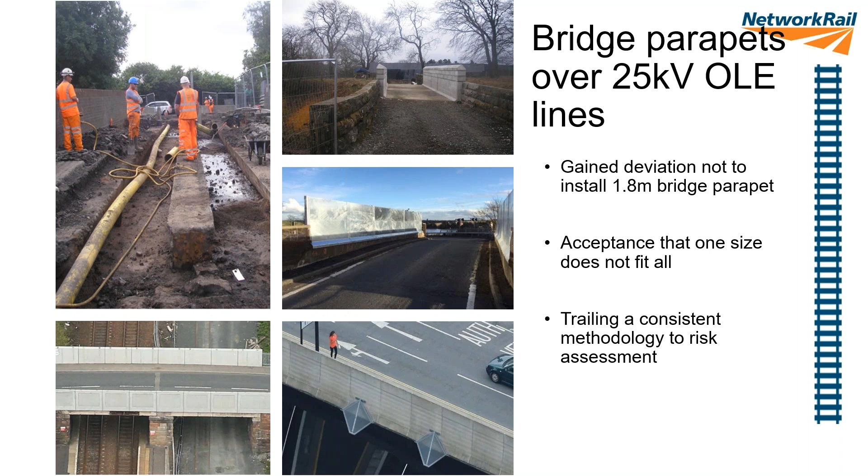But that's one opportunity we've developed with regards to bridges. The main cost in terms of bridge reconstruction is how we get the wires underneath the bridge.

In the good old days, as people have reminded me many times, we followed the Blue Book, published by the Department of Transport. This had a hierarchy showing normal clearances, reduced clearances, and special reduced clearances. For each of those levels in the hierarchy, we had a simple and well understood set of assumptions and design tolerances.

Now in CP5, a number of factors happened, including fixed deadlines for project authorisation and the combination of the TSI, GLRT 1210, AsBos, DeBos, etc. Projects were unwilling to jeopardise the authorisation of electrification and the start of service stage. This meant that clearances grew rather than reduced, and in many cases the clearances in Control Period 5 were almost up to 5 metres in terms of the soffit height.

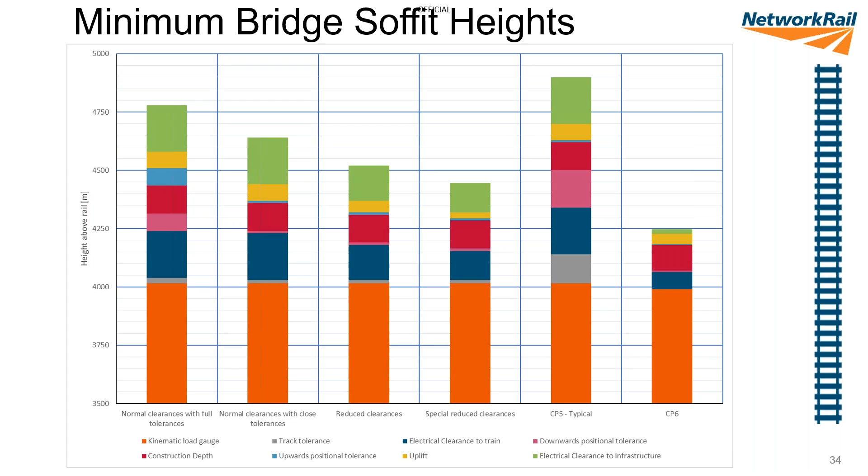And compliance with all key railway standards. The key railway standard is obviously GLRT 1210, which requires an electrical clearance derived from BS EN 50124, or a reference system of 270 millimetres, or a risk assessment.

50124 requires an electrical rating of 200 kV for basic insulation. 200 kV is not a new value.

It's a value that's been used for the last 50, 60 years for testing and demonstrating the insulation rating of overhead line insulators, switchgear, cables, transformers, etc. So it's a long-standing value.

50124 also provides categories for reinforced insulation, which is equivalent to double insulation, and functional insulation, which provides sufficient insulation for operation of the electrical circuit, but not sufficient to prevent or protect against electric shock.

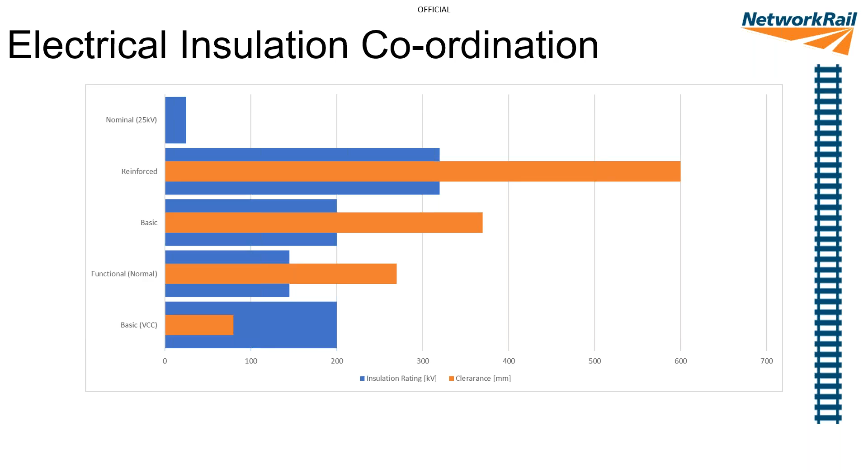Transients occur on the electrification system for a number of reasons: switching or operation of a vacuum circuit breaker, or overhead line switch, or the VCB on the rolling stock, poor contact between the contact wire and the pantograph, or maybe even the high frequency switching on modern traction packages.

Historically, British Rail carried out impulse testing to develop the electrical stress graded bridge arm back in the 70s. But this used a waveform derived from a British standard from the 1940s, which is much lower in magnitude.

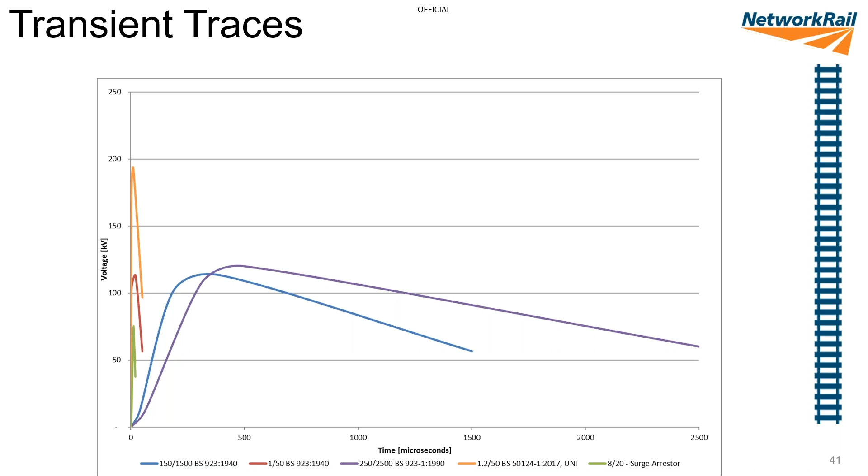The surge arrestors that we've used are applied either side of an overhead line structure, with two surge arrestors on each electrical section. Those two surge arrestors provide a level of redundancy should one fail.

The surge arrestor is connected via a jumper to the catenary of the overhead line system, and then connected to the earth connection of the overhead line structure by a jumper at the bottom of the surge arrestor. It's mounted on a 25 kV standard insulator and has an expulsion fuse at the bottom of the surge arrestor.

So in the event that the surge arrestor is severely overloaded, which seems very unlikely, the expulsion fuse would operate and the earth connection would drop down, taking the surge arrestor out of circuit.

The electrification system would still operate, but the protection offered by the surge arrestor would no longer be available until that surge arrestor was replaced.

Surge arrestors are nothing new. They were developed almost 100 years ago and are widely used in the electrical supply industry and almost all modern electrical rolling stock.

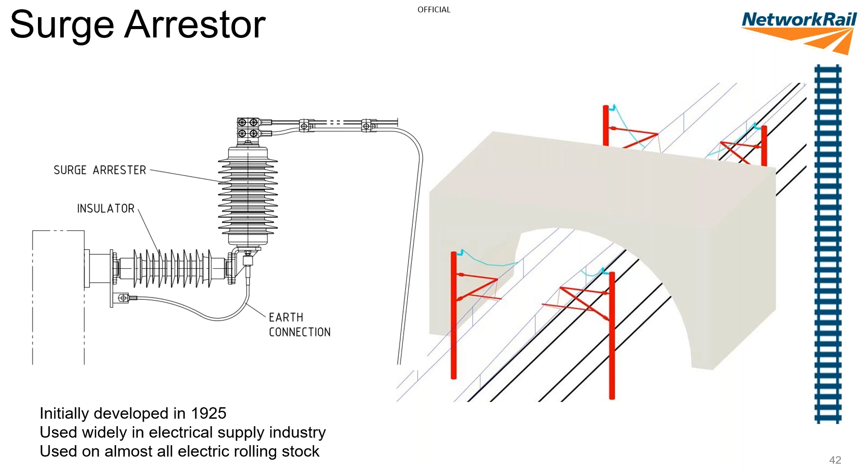And it's not just Network Rail that's using surge arrestors in electrification projects. This is an example of the Danish railways, courtesy of Google Maps.

You can see that surge arrestors have been installed next to a low clearance bridge to mitigate the effect, allowing low clearances underneath that bridge.

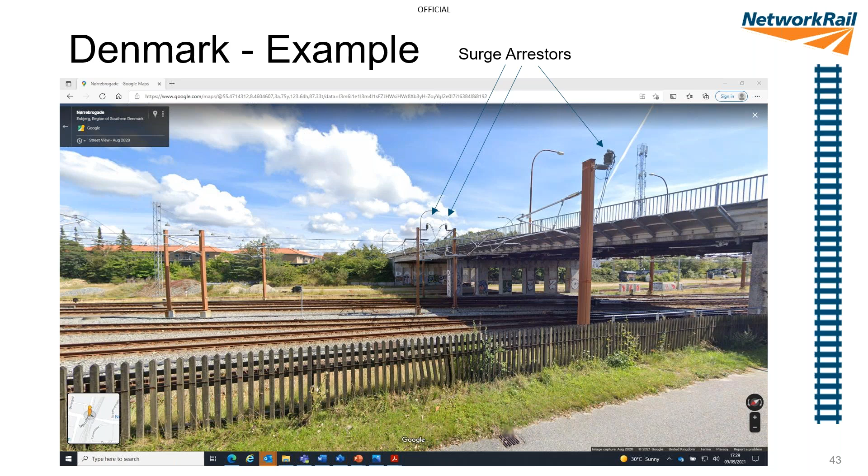And here's an example from Tokyo, a different electrification system. I think it's 20 kV compared to the 25 kV system in Denmark.

But you can see surge arrestors, similar concept, applied to a portal adjacent to the low clearance bridge, and supplementary insulation in this case also applied to the contact wire at the bridge itself.

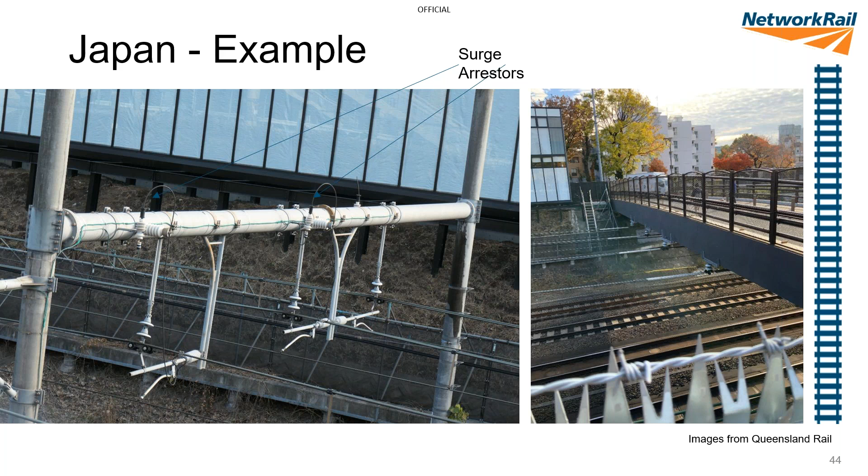But where we are different to the other railways is that we've taken all the components that form the electrification system under the bridge and tested them as a system.

Tests we've used are in accordance with the standards you can see on the left, which require testing with both positive and negative impulse transients or waveforms.

It also requires those configurations are tested multiple times and provide a withstand with no flashovers before the configuration can be declared a success.

Now we've enhanced the test requirements and standards by testing in wet conditions as well as dry conditions, and those wet conditions require a salt mist applied in the environmental chamber to take a real worst case environmental perspective on those clearances.

And we further enhance those tests by applying pollution to all insulated surfaces of the components that we're testing.

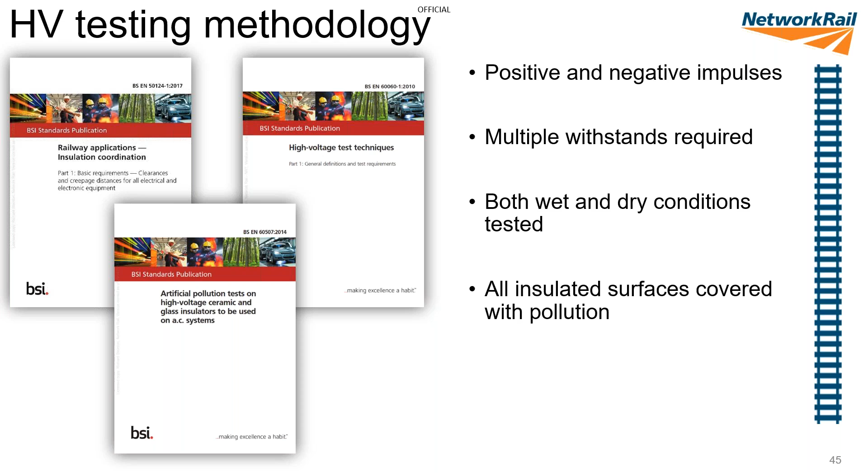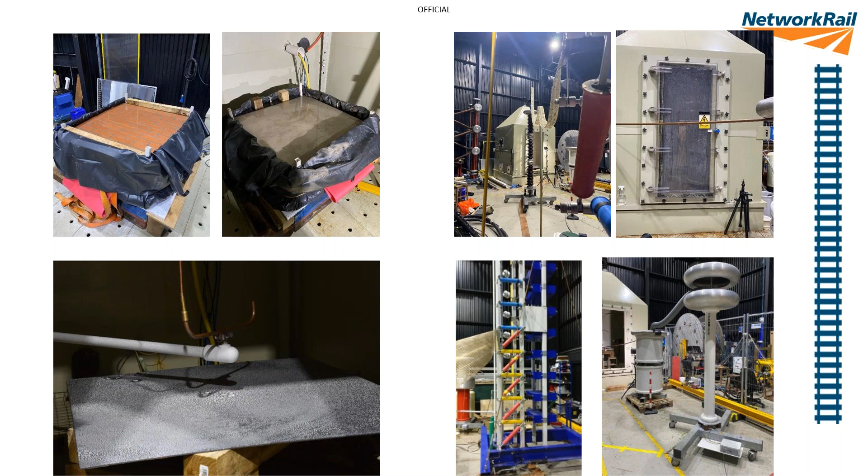On the left you can see some of the bridge samples, with the brick and concrete samples at the top of the screen. These were pre-soaked in what was known as a paddling pool over the weekend before any testing commenced, so a minimum of 48 hours. At the bottom there's a steel plate representing a metallic bridge, coated in an insulated polyurethane coating, with a pollution mix applied to the top of the coating.

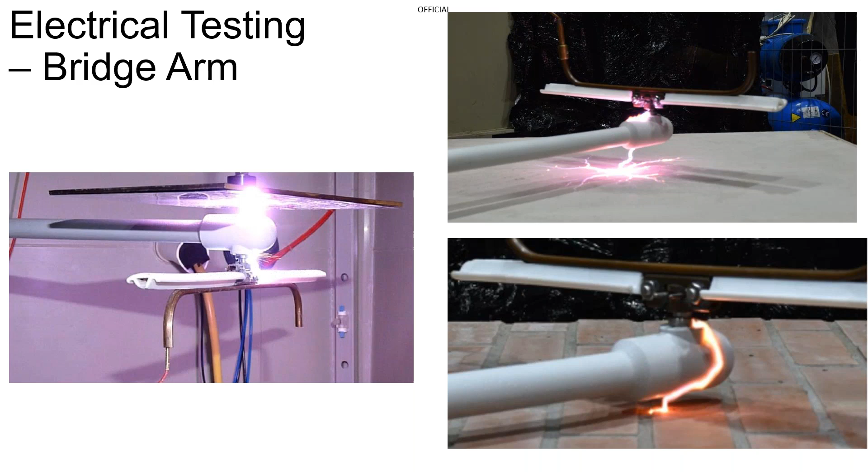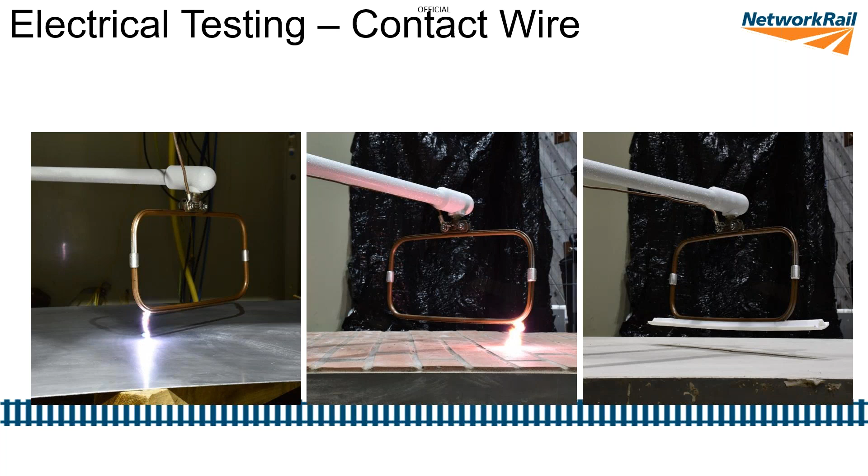Unfortunately, the photographs always look boring unless we have a flashover, so I've selected photographs that do show a flashover, but rest assured the path is only a few millimeters greater than in these flashover photographs. To demonstrate that, these photographs show the top of the contact wire to a bridge structure, and as you can see on the right hand side, without a flashover, the photograph looks very boring. Similar to before, we've got top of the contact wire to steel, brick and concrete, and the concrete sample has a secondary insulation in terms of contact wire cover applied to the test.

The gauge profiles we've used have been W6A, W10, and W12. We then supplemented that by adding an aerial onto the top of one of the profiles to make sure we've got a worst case electrical stress raiser on top of those profiles, and it lined up perfectly with the contact wire.

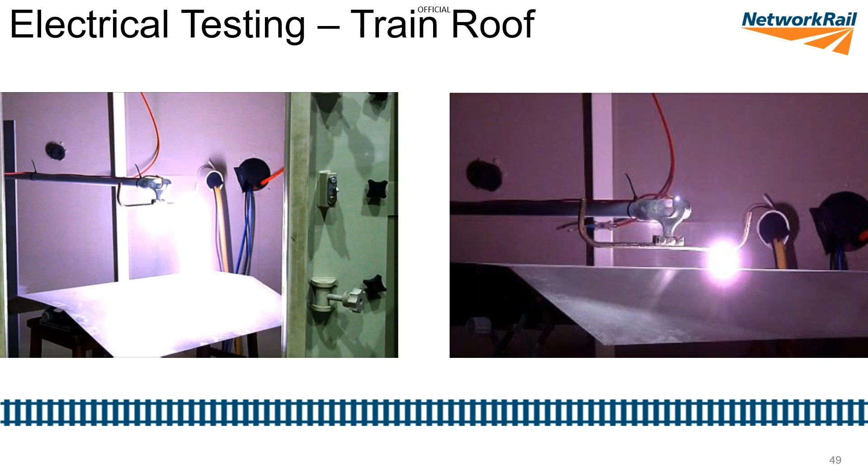We have also tested pantographs, with RSSB, using the open horn pantograph design and a closed horn pantograph design.

Further testing has been carried out in Scotland in service. Here we have a surge arrestor on the structure away from the bridge, and an insulated plate applied just directly above the bridge arm on the cantilever arrangement, allowing it to swing in and out should we have any problems with the in-service trials. I'm pleased to say the arrangement withstood the Glaswegian weather, and we were able to complete the test without a single flashover between the bridge arm and the plate.

And then we've got Cardiff Intersection Bridge. It was energised December 2019 and it's performing well to date. We've tested around 20,000 different impulses, and there's a selection of testing we've carried out there.

To supplement those configurations, we've also added supplementary insulation in terms of the contact wire cover and the insulated coating applied to bridge victim plates. So we've got a wide range of options available to designers and projects to really minimise those electrical clearances.

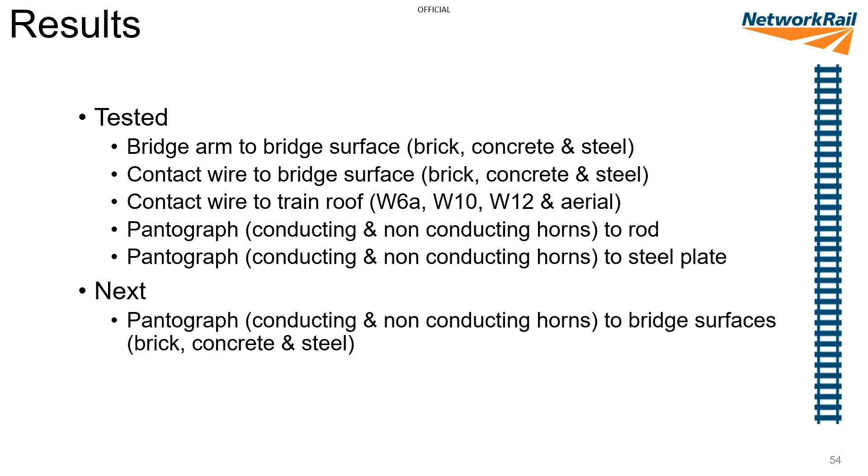We've also tested pantographs both with a conducting horn and a non-conducting horn, following success we've had testing the pantograph horn from HS1, or the Javelin trains. We took a pantograph horn off an in-service train, subjected it to impulse testing, and found it really promising. That prompted another avenue of development with Brecknell Willis to develop a composite pantograph horn that can be retrospectively fitted to the HSP Mark II and HSX pantograph heads. As you can see, it's a simple bolt to be undone, the pantograph horn swapped over, and a new pantograph horn inserted and secured.

We've carried out a number of tests and hope to get the trial commencing soon. Those tests have included a mechanical test and an electrical test. We've applied over 1,000 newtons to the tip of the horn and measured the deflection at the key transition between the carbon carriers and the insulated horn.

We've also carried out an abrasive wear test to compare the composite horn with the steel horn. I'm pleased to say the composite horn only lost 7% of its cross-sectional area, compared to a steel horn which lost 30%, in tests operated on the same location of those horns for approximately 200 kilometers.

Electrically, the horn does not flash over when an earth plate or earth rod is in contact with the tip of the pantograph horn.

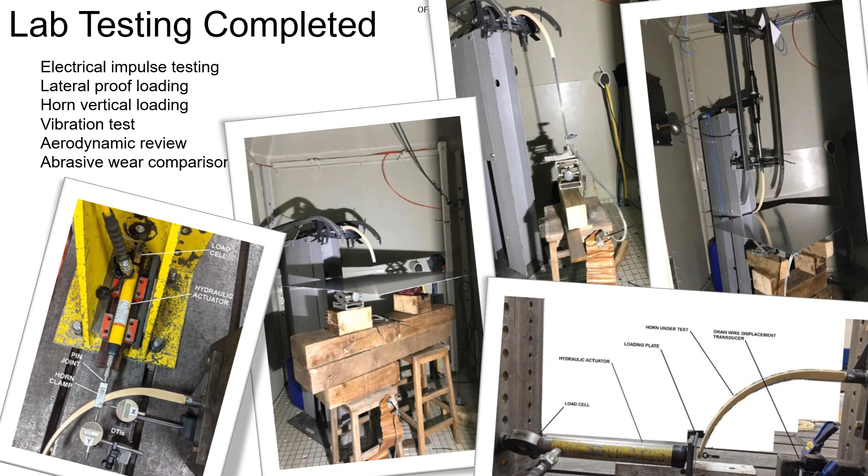Normally when I talk about insulated pantograph horns, I get told they can't work on legacy infrastructure. Here's a photograph that proves it can. The North of London Eurostar trains operated with a composite, or insulated, pantograph horn, and these were operated on the West Coast Main Line as part of trials, and on the East Coast Main Line in service between Leeds, York, and King's Cross.

The current collection test report from the mid-90s, which I wasn't involved in, shows that while the pantograph horn did not cause any issues, the uplift of the pantograph was a concern, and that probably brings us on to the next subject we've investigated.

So working with Atkins, we've studied the uplift created by the passage of pantographs at bridge structures around the country. Using digital imaging cameras, we're able to record the uplift when the train passes, resulting both at the bridge arm and the bridge approach span.

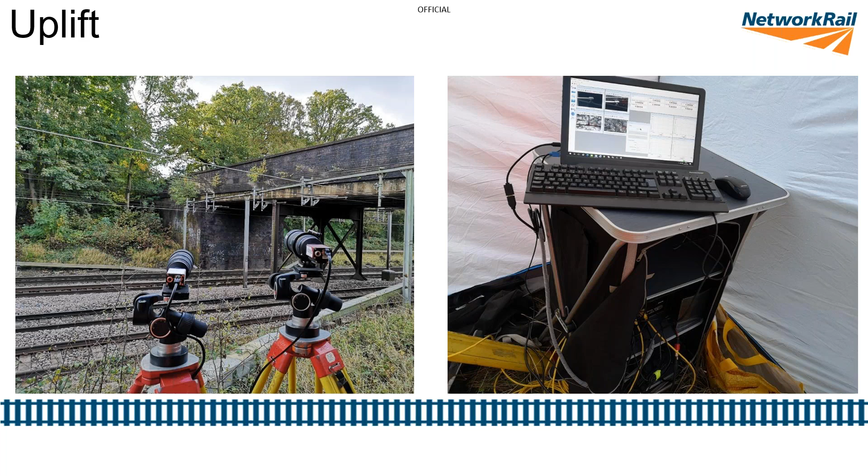We've monitored a variety of overline equipments, train speeds, and maintenance regimes. The resultant trace you get from each train passage is something similar to this, where you've got the time along the x-axis and the displacement caused by the pantograph passage, in this case 2 pantographs, on the y-axis.

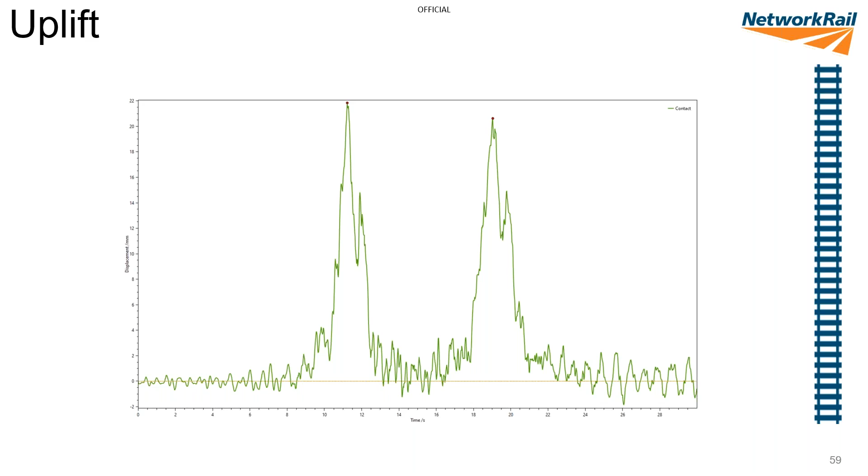Summarising all that data together, we get a normal distribution, standard distribution, with a mean around 20 millimeters. 20 millimeters is great because that aligns perfectly with our model results.

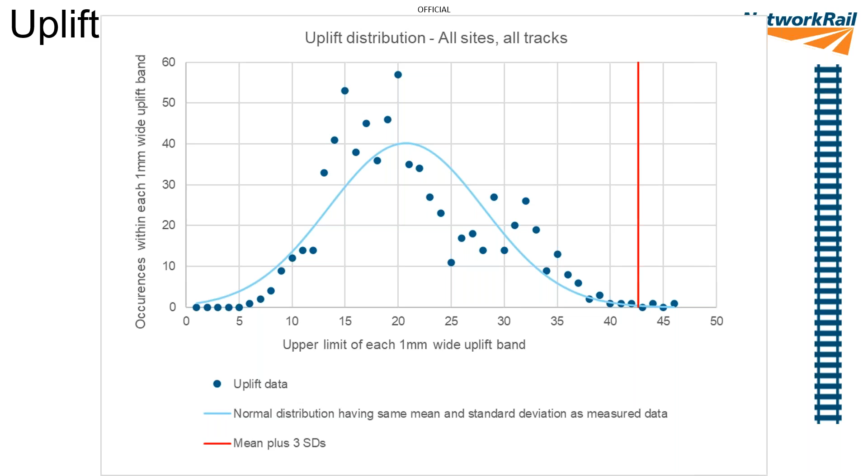Taking a mean plus 3 standard deviations allows us to gain 99.9% of the uplifts we measured in our sampling to include in our revised assumptions for the clearance calculations. However, we do recognise every so often we may get a rogue pantograph or rogue uplift, and therefore we have an opportunity of flashover.

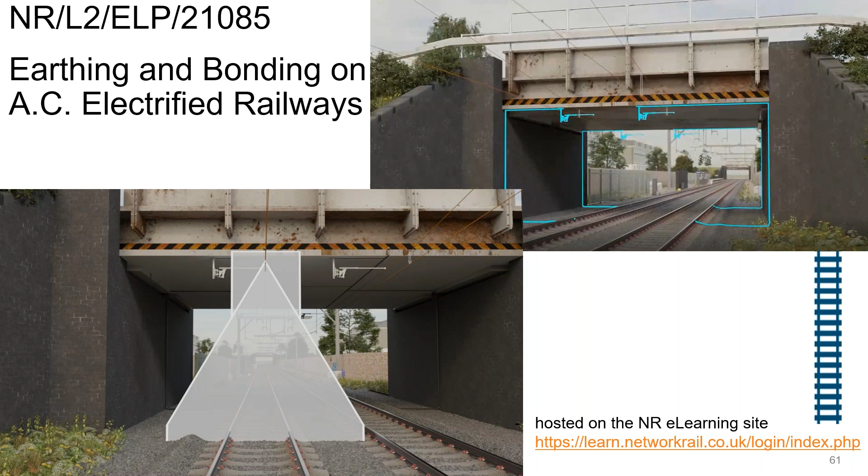And so we have updated the Network Rail Standard for earthing and bonding to explain the requirements clearly, and we've also provided an e-learning website to communicate that visually, as you can see here, with access available to all on the link at the bottom of the screen.

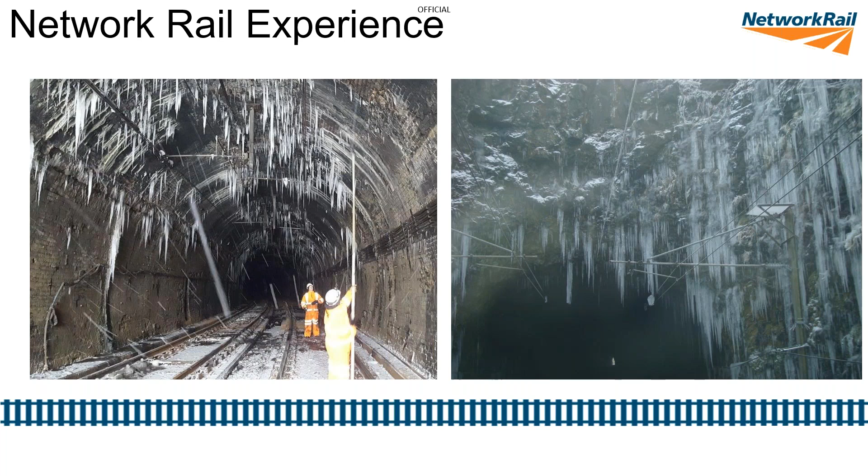But the reality is that ice in tunnels and structures forms as icicles, not as a nice round load, and doesn't respect the overline or the vehicle profile. Whenever icicles form in structures, we have to send in icicle patrols to remove them, and it seems irrational to assume the loading would be anything other than that in the future. So we need to revert to the methodology used in the old Blue Book and a number of railways around Europe, and not include ice loading in calculating electrical clearances.

How does all that work? Well, if you take a pan profile that's typical from CP5, with a W6A train gauge and a standard structure, a typical brick or masonry arch — on the right-hand side you've got the black line showing the carbon carriers, and the grey line just below it showing the secondary horn. The red lines and circles show the electrical clearance required to avoid flashover, according to CP5.

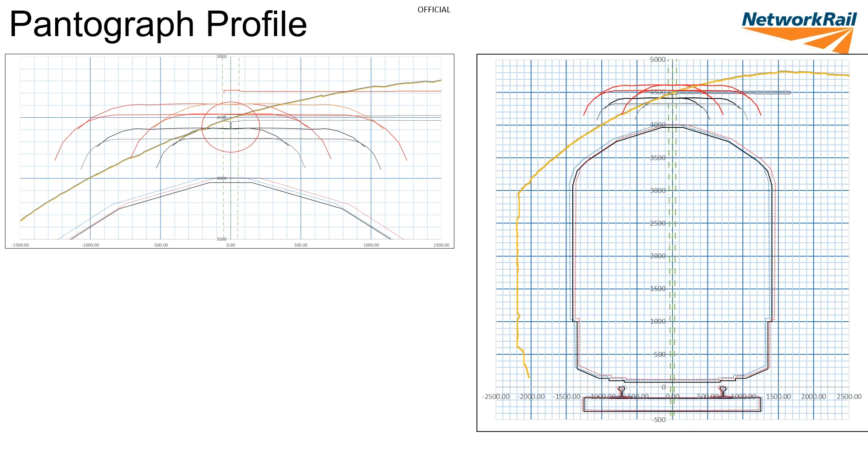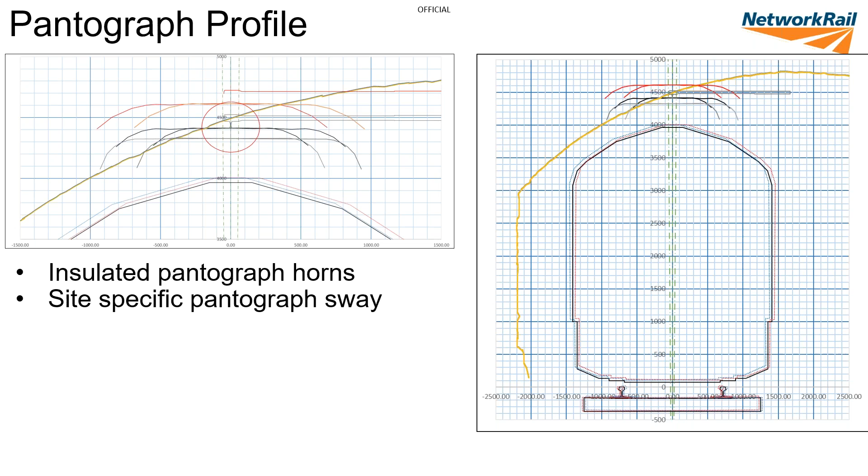But if we apply insulated pantograph horns, we take the secondary horns out of the equation from an electrical perspective, and then apply site-specific pantograph sway, as David's going to describe later on, which allows us to narrow the pantograph profile.

Removing ice loading from the equation allows us to lower the contact wire height, as does using a revised figure for uplift. Applying voltage control clearances allows us to reduce the contact wire height down to the minimum of 4165, which is almost there, and now it's clear mechanically.

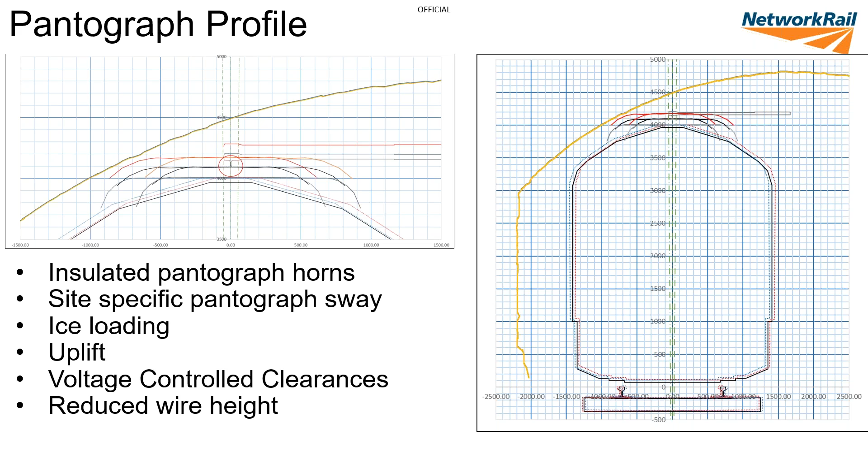We are also able to apply for deviation against GLRT 1210 for the minimum contact wire height, as we've done in Cardiff and Scotland, to maintain basic insulation between the train roof and the contact wire while lowering the wire height slightly below the established minimum, which in this case allows us to be clear for the structure. But if you want to go further, there's also the opportunity to install slab track.

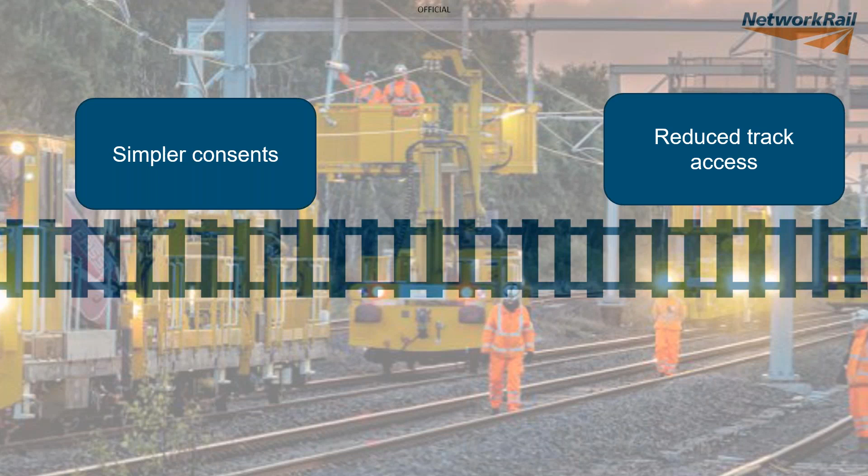Applying this technique allows electrification projects to have simpler consents. We don't need to get permissions to change historic structures. Reduce track access, reduce the impact on neighbours and train operators, and reduce cost to electrification schemes. So definitely putting passengers first.

But in terms of electrification, we have a more pressing agenda. As Peter and Andrew have alluded to, we're not the only competition, the only option to decarbonise the railway. And for the electrification to be designed to be cost effective, we must apply these control measures to reduce the cost of electrification, and we need to apply them now. So that's my presentation. Thank you very much.

Richard, thank you for that. And I do like your new electrification poster at the end there, by the way. I'm trusting that you'll make that available so that everyone can put it on their wall. Yes.

Richard, while we wait for some more questions to come in, we've got some already, but can I take chairman's prerogative and ask you one to kick off the discussion, if I might, please? Cardiff Intersection Bridge, what's its history since energisation? Have those arresters actually functioned? What do we know of that yet?

So the surge arrestor have functioned a number of times. The last time I heard it was over 25 operations according to the condition monitoring we installed in those surge arresters, which needs further study. But in terms of circuit breaker operations and flashovers, there's not been a single flashover since energisation almost 2 years ago.

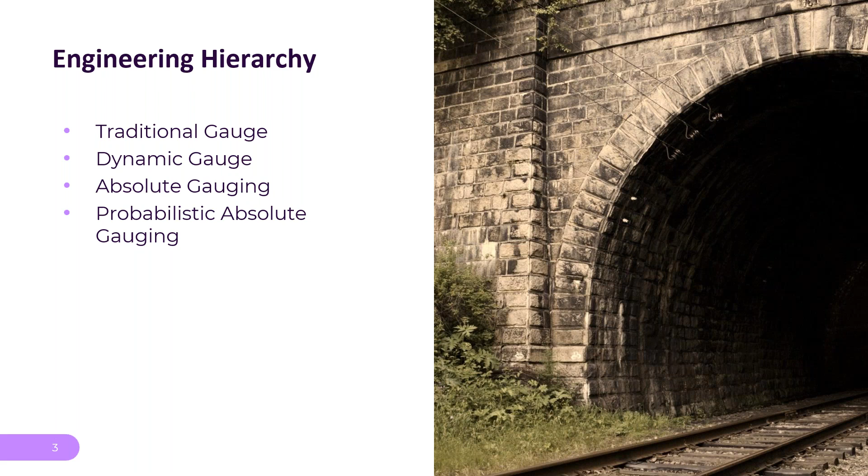So I'd like to start off by looking at the traditional pantograph gauge. Now, everyone knows that gauging's easy. I'm sure there's an awful lot of people on this conference who've been involved in gauging in the past and would possibly challenge that statement. But the world as a whole knows that gauging is easy. You make the hole bigger than the train, or the train smaller than the hole. It's as simple as that. And the measure of the hole size is the gauge.

So effectively, all we need to do with a gauge is to put our gauge profile over the top of the track, align it with the track, set the contact wire height, and the gauge line that comes out of it says you must not have your structure that comes within this space. Now, that's absolutely perfect, provided you've got that space. If it's a relatively big bridge, you know, the M62 traveling over the West Coast Main Line or something like that, not going to have a problem with using that sort of technology.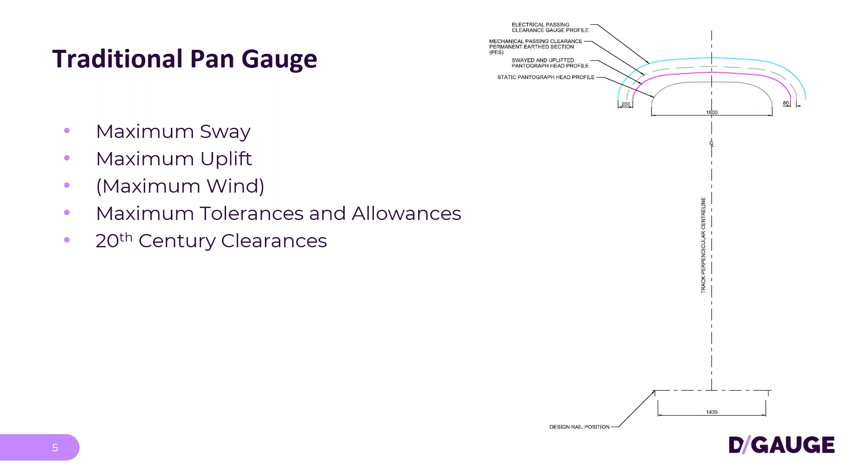So now I'd like to just move on to something else that we've looked at fairly recently. For those of you who aren't aware of this, there's a project recently been published by RSSB, T1196, a research project looking at pantograph gauges and the development of new pantograph gauges that align with the findings of the work done under projects, for example, such as the pantograph sway project, that determine what the limit state movements were for pantographs.

So that does mean that we've actually got yet another dimension on modern gauging that we didn't have some time ago under the traditional BR pantograph, which was relatively fixed. So we've actually got to consider other things now, as well as the simple factors that we had on the previous slide.

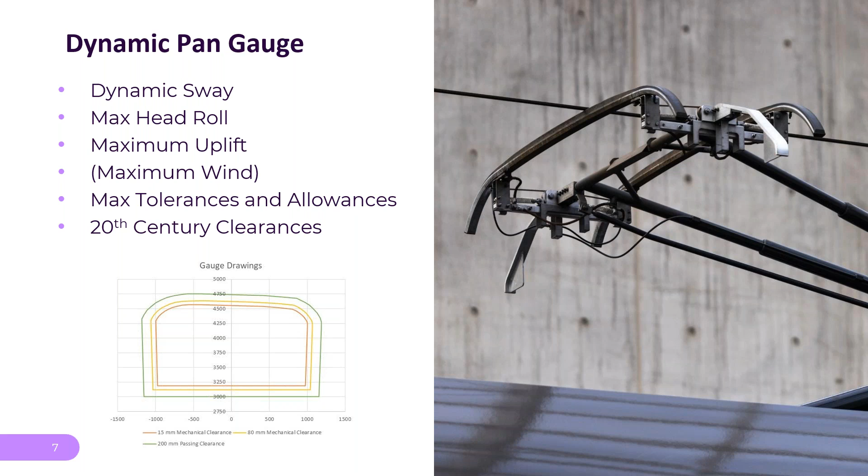These things have generally, in the past, been traditional gauges as drawings, CAD drawings particularly. As we start to move towards dynamic pantograph gauges, we're starting to use computer programs to calculate what the swept envelope of the gauge is. RSSB has published a complete set of Excel spreadsheets where you put the numbers in, for example speed, cant, curve radius, etc., and it will work out the gauge for you to give you effectively the CAD gauge that you would have used before. So that's what I would call a dynamic gauge.

So this is the dynamic sway, for example, and we can see from the top graph a traditional pantograph sway curve on curved track will be irrespective of the cant deficiency, and on tangent track, again irrespective of anything, it's just a dotted line with 200mm sway on it.

What we've looked at with the dynamic sway is the red line, which shows that we have a certain amount of sway that increases as the cant deficiency increases. Along the bottom you can see the effect of that on the actual pantograph itself.

All of these numbers come directly out of Railway Group Standard GMRT 2173, which relates to pantograph sway for any vehicle. In other words, any vehicle must comply with these curves. Therefore, in applying them to the infrastructure, the design is compatible with any vehicle.

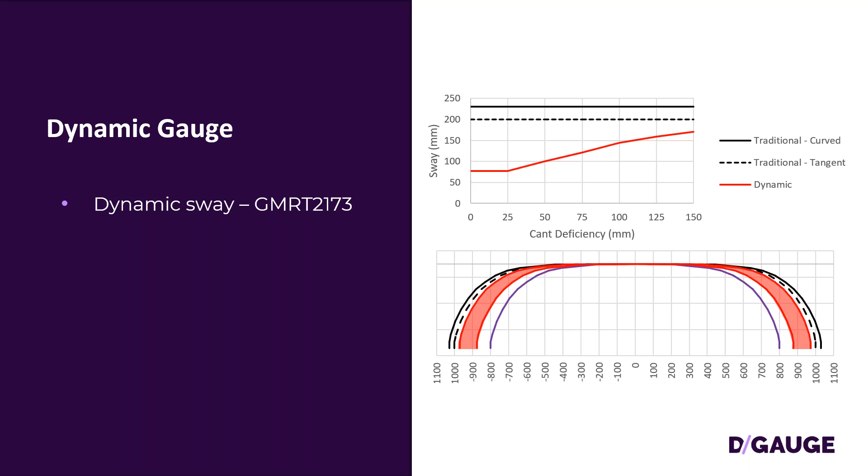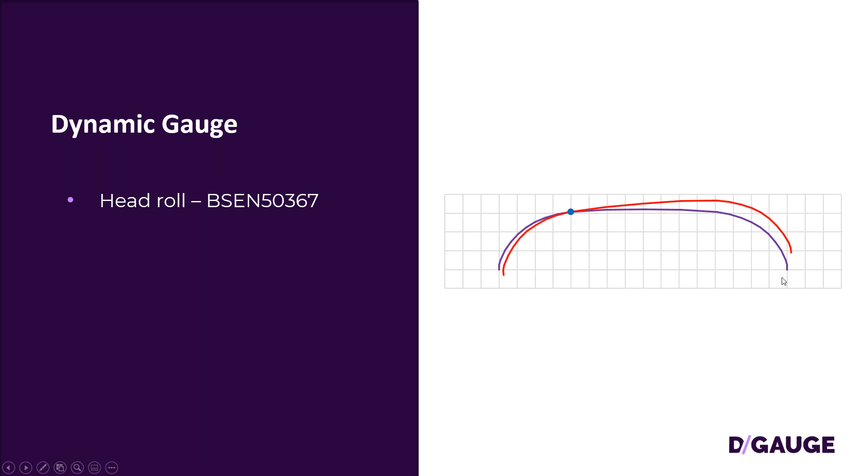Looking at head roll, this is the effect: as the contact wire moves through stagger to the outside of the pantograph, it causes the head on the other side of the pantograph to cock up in the air. We can see around that area there, where my mouse is following slowly, is actually the area where we need to apply additional clearances, and certainly around the horn area we can see that the head roll does require us to have more space.

I'm now going to move on to absolute gauging, and some of you will be familiar with this because it's a process that's been used for physically gauging vehicles for over 30 years now. It hasn't really caught on in the pantograph area yet, for various reasons, but it's something we've been doing for a very long time once we realized that vehicles could have softer suspensions than the traditional gauging methods we used in BR days actually allowed.

Now, absolute gauging uses vehicle sway, and it would use these sway characteristics that are defined for specific vehicles in something called a RIS 2773 dynamics model. This is something that has to be submitted with every vehicle introduction, that basically says for a given force acting on the vehicle on the track, this is the amount of sway it would see. It uses a specific pantograph model.

In other words, we look at the different pantographs and say how do they behave in relation to standards, in relation to the head rolls, in relation to uplifts - for example the arrangements, the spring stiffness, all of those sort of things. We look at local uplift, whether the particular steady arms we're using have certain characteristics, the wind speed and what that causes on uplift, and we look at the tolerances and allowances appropriate to the position, and appropriate clearances.

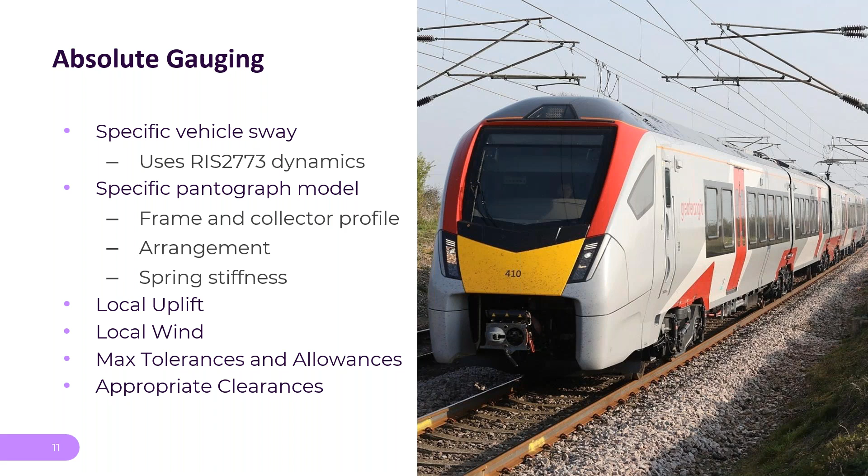The net result is we can come up with a swept envelope for the pantograph that's effectively specific to a given vehicle at a specific location. This type of introduction is often used to introduce new rolling stock to legacy electrified routes, to avoid having to completely re-electrify, because the route might not be built to the latest standards - for example, one that doesn't allow rolling head pantographs.

An example of this was introducing the FLIRT trains to East Anglia, where one of the problems we had was to demonstrate that the pantographs on the vehicle, combined with the roll of the vehicle, meant it could run underneath the electrical infrastructure, i.e. the steady arms, without clashing with them. Remember, the steady arms on East Anglia, and on a big part of our network, were not designed for floating head pantographs. They were designed for the traditional BR pantographs that didn't rotate at all.

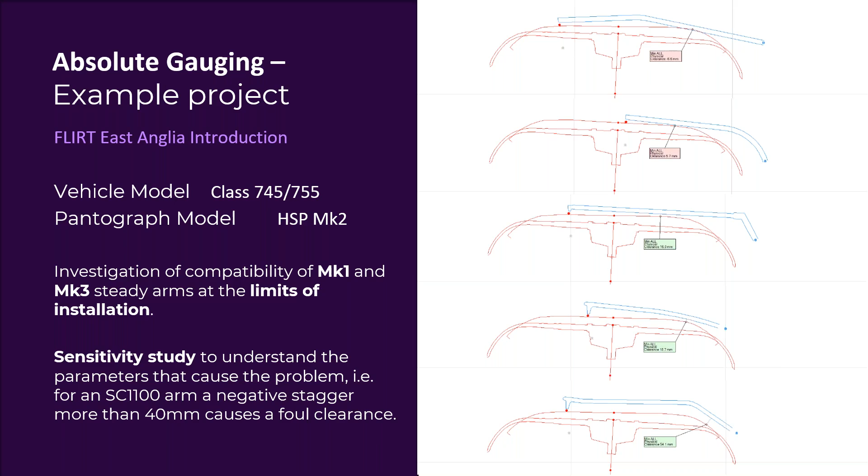So what we did was look at various different electrification systems and determine where the problems were likely to be, and if possible, what the solutions might be. Here's an example where we realized there was a clearance problem between the steady arm and a pantograph, which was solved by just using a 4mm reduction in uplift. That allowed us to introduce that vehicle past that point, knowing it would fit.

Another example, again on the FLIRT project, shows the physical clearance between pantograph and steady arm was increased from 13mm to 15mm by reducing the uplift again by 4mm. So we're looking at ways to introduce solutions that don't involve replacing everything on the network. That's very similar to what we're talking about in terms of avoiding bridge reconstruction, which is in essence what we're trying to do going forward for our electrification.

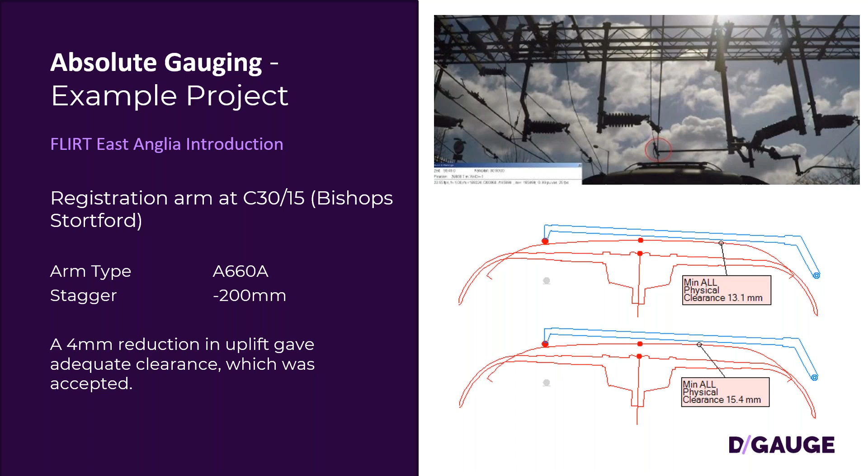But nevertheless, it's another way of looking at gauging: if you can't get a traditional gauge to fit through, if you can't get a dynamic gauge to fit through, the next stage is to look at the vehicles you've actually got running on the track and say, how can we get those through? That's very different from saying I want to future-proof my network to make sure everything will fit through in the future. We're looking to electrify the railway for now. If we can electrify it for the future, that's great, but there could be a huge cost premium if we actually electrify for the future, especially if we don't know what that future will be.

So what I'd like to do now is go on to the final part of my presentation, looking at something innovative but not necessarily new -- something you may have heard about called probabilistic gauging, which I like to refer to as real life risk. One of the interesting things about this is it starts to bring out philosophical questions, such as, what is a clearance? We say we want, for example, 270 millimeters clearance. Is that a number that exists, or is it part of a statistical analysis that says our clearance is around about this plus or minus X? I think you'll find it's the latter.

What we're doing with probabilistic gauging, as I'll take you through in a minute, is look and say we're going to characterize the clearance numbers with a level of certainty to say how my clearance relates to a particular location. Now, probabilistic gauging isn't exactly new -- it's based on something called uncertainty theory. If I take you back to 2007, it's something we were working on at RSSB, looking at a risk-based approach to gauging.

Probabilistic gauging is based on this uncertainty theory. It considers the likely aggregation of tolerances, allowances, movements, etc. in the vehicle-track system, and gives a probability distribution of clearance rather than a single number, which is usually related to the number you get if you say everything has gone wrong at the same time. What you get out of a probabilistic assessment is a clearance probability distribution, and we set clearance based upon some level of quantified risk. The methodology allows us to explain why a lot of legacy rolling stock successfully runs when theoretically we say it shouldn't. There's quite a bit of traffic that's old legacy rolling stock that's been running for donkey's years, that when you run it through clearance software, the answers say you shouldn't be running it here. So it's a methodology that allows us to look at that.

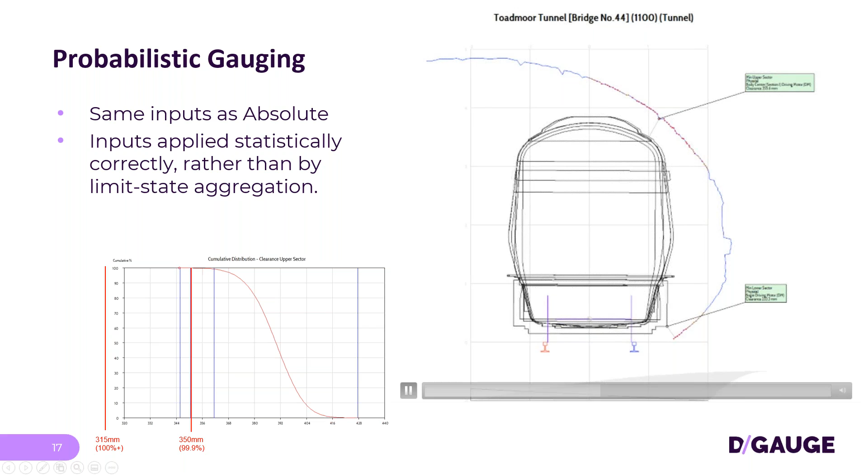Now, moving on to the next slide. Got it. Okay. On an example project, I think this is perhaps the first time we've ever looked at real clearances versus real trains, because it's difficult to work out what the actual number is for a clearance.

What we've done here is compared the probability distribution of a calculated pantograph passing a bridge versus measuring it in practice using high-speed cameras. This was done out on the Old Dalby test track.

We did it for a number of vehicles, including the Class 800 Intercity Express. We also did it for the Class 345 Crossrail vehicle. And what we showed was that we had an exceedingly good correlation between the probability distribution of clearances between a pantograph and an overbridge, theoretically, versus physically.

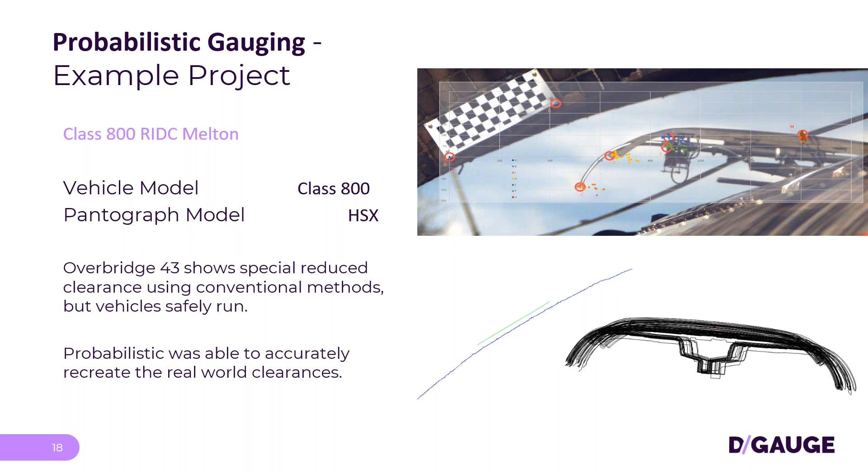So I'm rather proud of that test, that it demonstrated that the mathematics that go into the probabilistic clearance assessment are actually pretty robust, and for the first time ever have been demonstrated to pretty well match what we get in practice.

So in summing up where we should be, I'd like to say a couple of things. Our options for stopping the bulldozers coming in are rather more today than they were previously.

If you couldn't get a traditional gauge to fit in electrification schemes up to now, then it was time for the bulldozers to fill up with diesel and start getting ready to knock the bridge down. And I think somehow we actually rather enjoyed knocking bridges down and rebuilding them. It was the thing to do.

But if we look at going forwards to tomorrow and our challenge for the electrification of the future, we've got to consider that if the traditional gauge doesn't work, we've got to look at the dynamic gauge, we've got to look at absolute gauging, and we've got to look at probabilistic gauging.

We've actually tried all of these methods and used them in various places, but they're not mainstream yet, though they are engineering methods that engineers need to apply. I think really what we've got to do is make sure we don't forget these in our portfolio of going forward. So we've got all of these new engineering tools.

So what I'm doing is making an appeal to you as a professional engineer to stand up to the project managers that might be intent on rebuilding the railway on the strength of an electrification case. We've proved time and time again that it's embarrassing, the cost overruns that we have on our electrification projects.

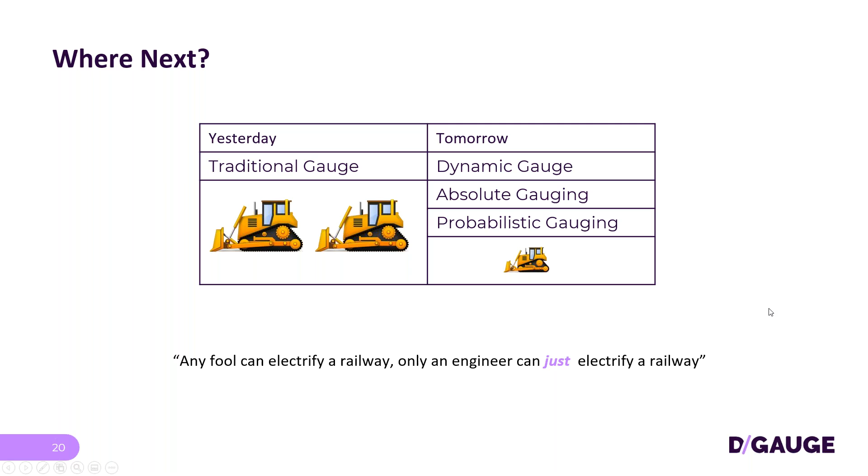So on that, I'd like to finish my presentation and hand back to Peter, and happy to answer any questions. Thank you.

Well, David, as one of the fools who has electrified some railways, I'm very pleased to hear your message. Really, that we can find ways of doing this. While we just have a look at the questions that have come in, can I just give you one to kick off the discussion, David, if I might, please?

What other industries have used similar approaches, and what's the experience been there? Well, it's very interesting because, of course, I think railways are a special case. Somehow or another, we think we're more special than other industries, but it's used in the nuclear industry, it's used in the aerospace industry, and it's used in the automotive industry, because all of those industries have recognized that there is no such concept as absolute safety. And therefore, what they're looking at is to get the best engineered system using the minimal amount of conservatism necessary.

I think we can all look at those industries and say that, particularly if we start to look at aerospace, I don't believe we have any issues going on a plane and realizing that Rolls-Royce use these techniques day in, day out to engineer their engines. And indeed, it's not that long ago that the technical director, engineering director of Network Rail, who came from Rolls-Royce, wanted to introduce this technology into the industry, and really we just weren't ready for it.

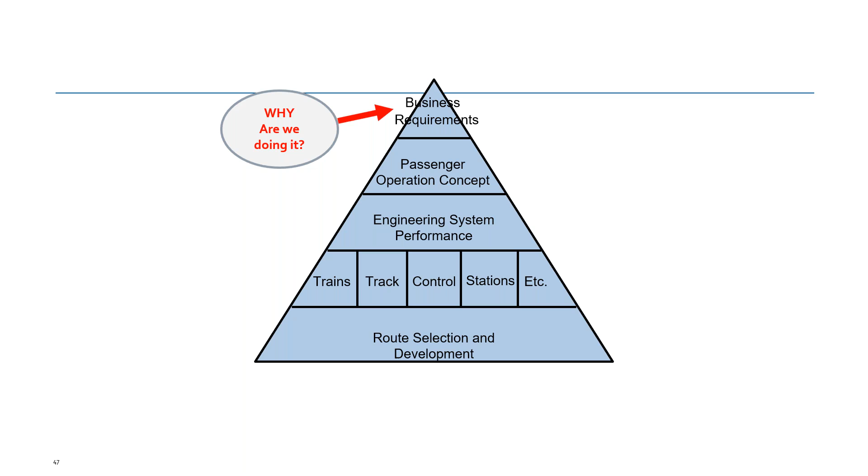We've been through COVID and we're coming out of it, and there's been a lot of doomsday talk about the impact. Well, it's quite clear, we're no different to the rest of the world. Cities do remain the center of our civilization. They're where economic wealth is created and where all social activity is organized. So people are wanting to get to cities, people are wanting to live in cities, but cities behave very differently.

London is a bit of a special case. Not only is it the only megacity in Europe, it's a city very dependent on so-called white-collar office workers—over a third of people who work in London work in white-collar industry. Places like Manchester, Birmingham, Leeds are much more typical of cities, not just in this country but across Europe, which have a very substantial office-based workforce, but the majority of people are not office workers.

The office workers may well be, probably are, looking to work from home or work flexibly more. Most people, and we need to remember this, do not have that choice. Whether in manufacturing—it's pretty hard if you're part of a factory to say 'I'll work from home.' A lot of people are enablers. We are enablers; you can't run a transport industry from home. Doctors are enablers, teachers are enablers. A vast proportion of our people need to get to work—they cannot choose to work from home. So what does that mean for commuting?

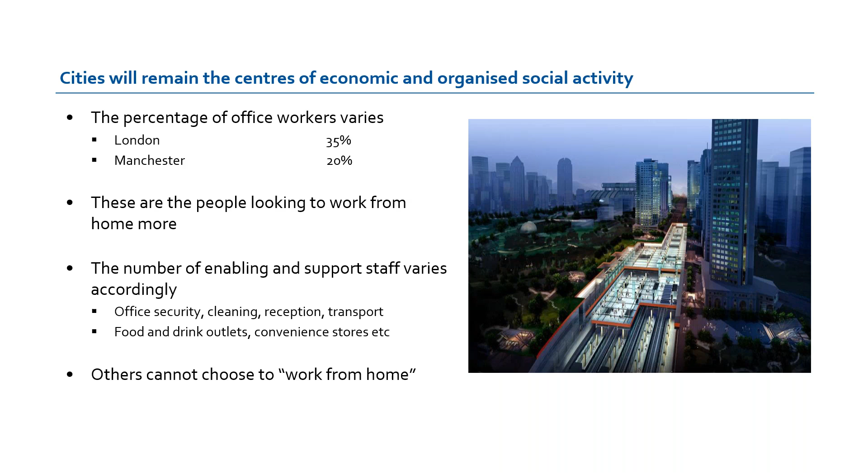The impact we begin to see settling down now. Commuting is probably 3 days a week for office workers, but still at least 5 days a week for pretty much everybody else.

But we do face an even bigger challenge in our cost base if we're starting to provide schemes and resources that are only going to be used 2 or 3 days a week. The traditional imbalance of peak becomes worse post-COVID, not better. We've got to justify things on the basis of people not being here 5 days a week.

And those that do, a proportion of them—and again it's probably a bit overblown—are looking to use their weekly commuting budget differently. If you only commute 2 or 3 days a week, you can get your head around commuting for longer. The Sunday Times described this as '90 is the new 60'—a 90-minute commute is acceptable for 2 or 3 days a week.

Is it equally as acceptable as a one hour commute was five days a week? What do these people really want from their commute? Well, one of the things they want is reliability, and the other thing they want is reasonable cost. Cost and reliability, cost and reliability - keep bashing away at those two things.

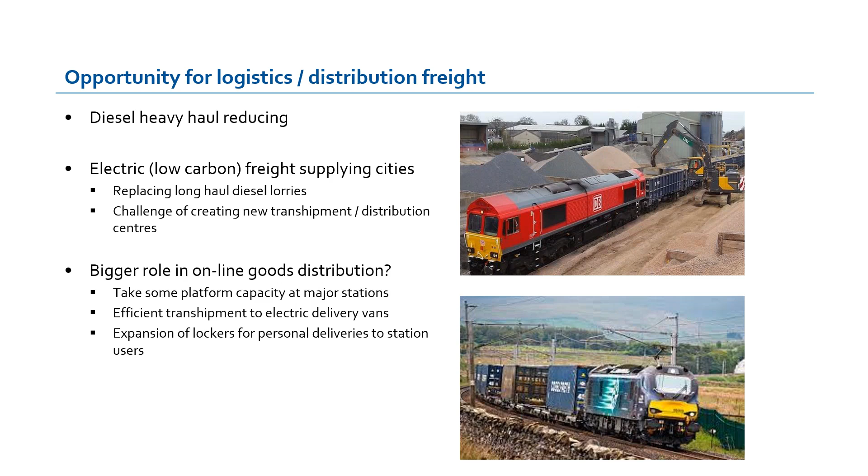Now, what about the opposition? Let's go on to the next slide, please. You read the trite stuff in the press and announcements about decarbonising the road. Don't believe it.

One thing not many people know - how much carbon is there in an electric Jaguar? There is so much carbon in the creation of the battery for a Jaguar SUV, you'd have to run it on totally green electricity for about 160,000 miles before it crossed over in carbon use with a petrol equivalent.

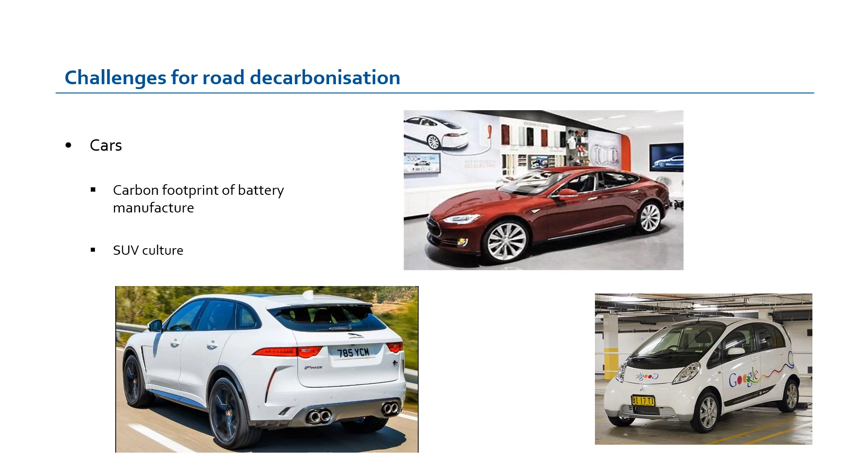Don't underestimate just how much carbon goes into a car battery, particularly a socking great big car. If we all drove things like the Google car, the equation's a bit different, but people don't - they go and buy great big electric tractors and sit them on the drive. They are ruining the planet faster than if they bought diesel cars. So just remember, we have an opportunity here if we get it right, if the price is right.

The other challenge is pretty hard - charging a car if you live on the 14th floor of a block of flats. Leave that to one side, I'm sure there'll be a miracle solution to that. But what does affect us is all the demand for electricity.

So even though we as an industry don't use very much electricity, don't think of it as a free good either. There is going to be a huge squeeze on electricity, energy creation, full stop. If you take the government's desire to quadruple the amount of offshore wind electricity generated, allegedly in the next 9 years, quadruple it, that will cost about £200 billion - and that's not my figures, that's the electricity industry figures. It's not just the creation of all those windmills, which uses quite a bit of carbon, it's the creation of all the transmission infrastructure.

If we get to the point quite quickly where there is not a great amount of electricity knocking around and an awful lot of people wanting it, we are going to be in the queue alongside road transport, alongside heating, domestic heating. If it's a choice between the lights going off and people freezing, us demanding lots of electricity because we're overusing it is not going to go down terribly well.

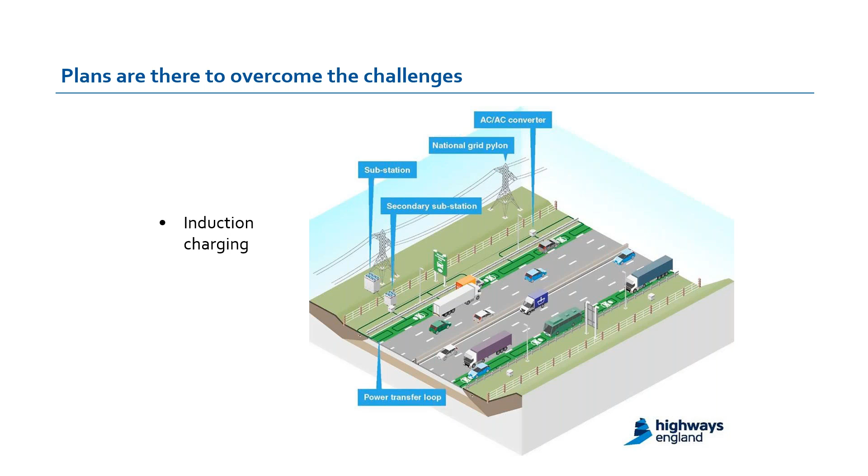The other thing they're funding is overhead line. We should be the blasted experts in this country on overhead line. If we don't get on with electrification, if we say, oh, we'll do it in due course, we'll do it in CP9 or something like that, well, frankly guys, the opportunity has passed.

And this is where I'm really with Andrew Haines - we need to get on with it now. People will be investing in electric lorries running with pantographs on the M62 in the next few years, unless we can give conviction that we're going to get on and electrify a railway.

And if we say every railway we need to electrify needs to be absolutely rebuilt, well, even if cost was no object, we'll be timed out. We cannot do projects which take decades. If we move on, please.

So where do we stand? Well, here's a couple of comments. You might not think I was going to start with what does it look like, but I'm going to. And the reason is, I've had the privilege of dealing with 5 different secretaries of state on high speed 2 - some of you know that. When we come to overhead line, yes, we have a discussion about cost, but we quickly get on to it's hideous.

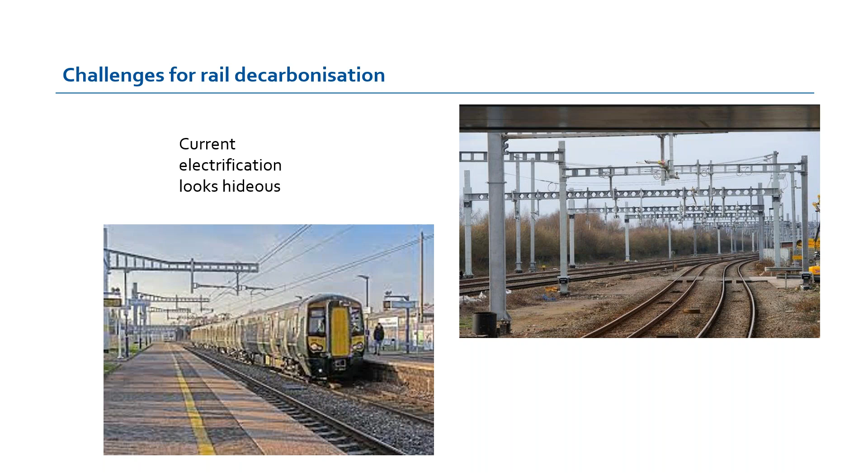And that's why I've used the word hideous. If it's totally over-engineered and over-designed, guys, we can do better than this. We cannot have electrification that is so over-engineered that even the people who want to support us go, shudder, I don't want this. I'd rather we shut the railway and produce a bicycle track, frankly.

So moving on, the next challenge is - just remember it wasn't always like this. You can find well-engineered electrification. Yes, of course, I put up a picture of the East Coast, which is Peter Dearman's claim to fame, a Durham viaduct. But electrification doesn't have to be hideous.

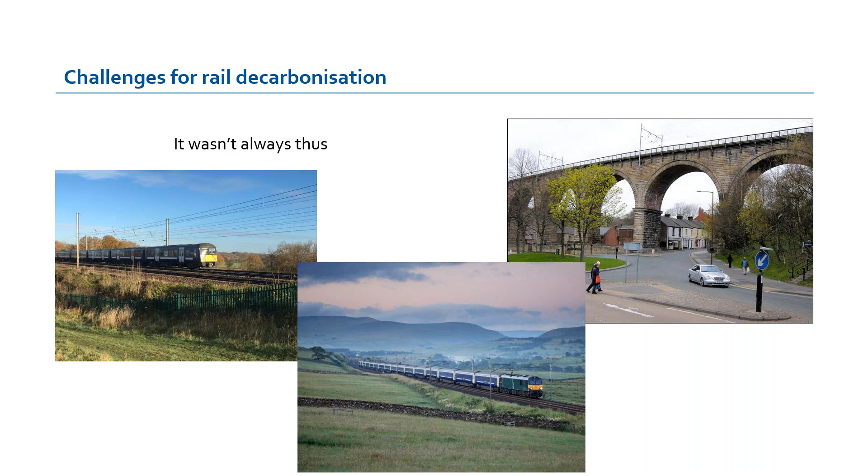And when you think where we're going through communities and across valued landscape, engineering is taking what some of the philosophy of this afternoon, which I know has been focused about clearances, and going every aspect of it - how do we make it better? Not how do we make it so clunky that it looks like a child of 5 has designed it, not a qualified engineer. Moving on.

But here's the biggest crunch. Everything costs too much. Why does electrification in this country cost more than double pretty much anywhere in Europe? In those notoriously low-cost economies like Germany, Austria, and Switzerland.

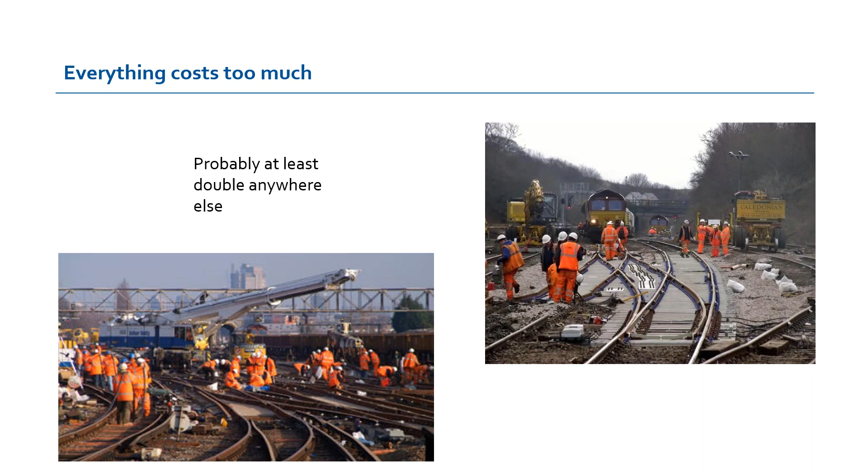Well, you only have to look at some of the things we do. The biggest thing we do, before we even think about how we do it, is we over-specify it. This afternoon has been about getting rid of over-specifying basic electrical clearances.

I hear a lot about things like, oh, we need tens of millimeters in case we want to change the track, in case we don't quite get the track right. Do you think any other country in the world goes, we're going to start knocking down bridges because we can't be bothered to get our basic engineering to a high enough quality? This is where poor quality track work, poor quality anything, is costing us a vast amount of money.

I have a simple approach, and it's an approach I intend to take in this beautifully titled National Electrification Efficiency Panel, which I've been asked to chair as a kind of non-expert. And believe me, in electrification, I'm a non-expert.

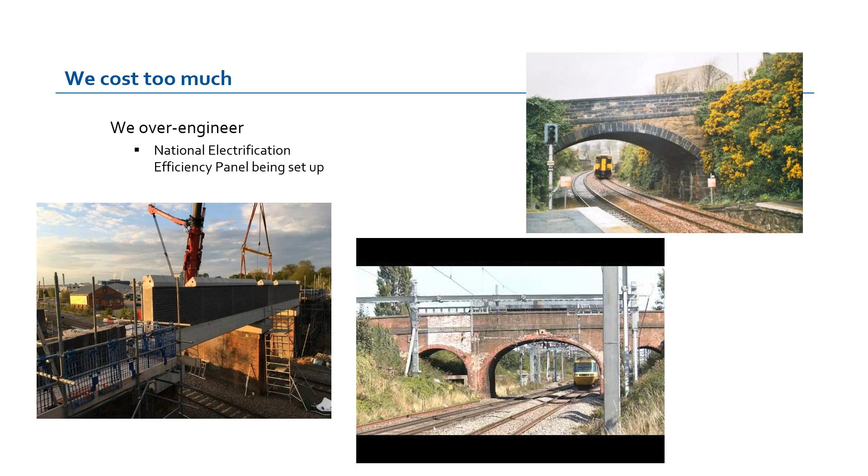Now, next slide, please. If we get our specification right, there'll be a lot less to do, and that is the best way of saving money. The best way of saving money on an engineering job is to avoid needing to do the work. The next best is, what we do need to do, do it efficiently.

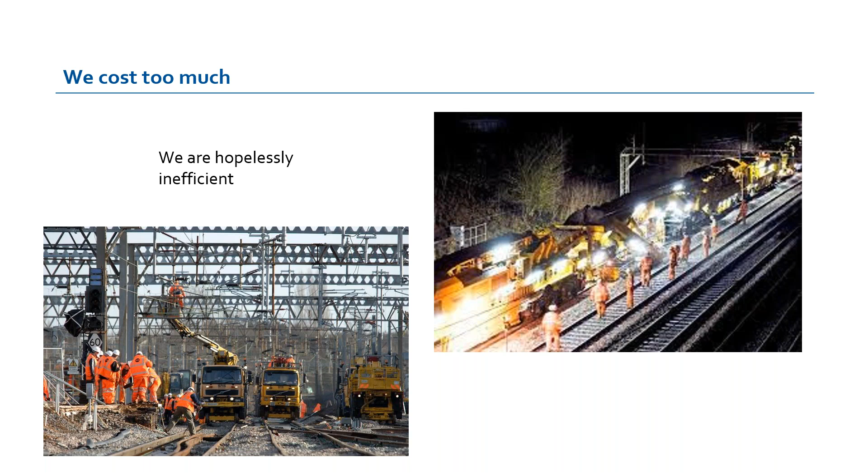I'm kind of stating it very bluntly because these things matter. Our first job as engineers is to avoid work. Our second job is to do the work that is unavoidable efficiently. Don't leave it to everybody else. This is an engineering challenge. Engineers should do what any fool can do for a quarter of the price. Don't be one of the any fools, please.

Next slide, please. We need a philosophy that says we're going to go for high quality, because high quality means we don't need lots of various tolerances. If each discipline of engineering works professionally, then the bottom line is we don't knock the bridge down.

If you take that wider, when we do work, don't bespoke it. It's not fascinating to do bespoke operations. Standardization leads to factory production, leads to high-skilled workforce producing high quality. Key word there is standardize.

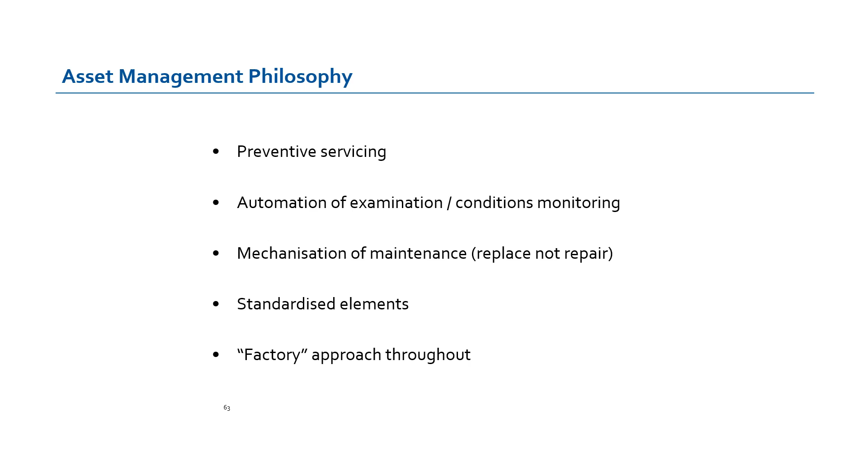And then if we move to one more slide. We got to get on with this. There will be wires on the M62 by the end of this decade. If we're still predicting it will take us 20 years to wire up our main network. If we're saying there is so much work involved, we haven't got the resources. If we say there's so much cost involved because we've over-engineered it. If we say there's so much cost involved because we're inefficient.

We've seen the Railway Industry Association put forward its own analysis. It's a good analysis. I want to push the profession in this country to move that bit further and really engineer electrification as the minimum credible solution at the minimum cost, not as some sort of fantasy thing. Because if you were to walk the corridors of the Treasury, the answer is we're not interested. There will be better alternatives - it's called the road. Sorry guys, but that's how it is. Thanks for listening, Peter, back to you.

Andrew, thank you. If you would stay with us, I'm going to invite David and Richard to join. Whilst they do, Andrew, we have a question in the questions which I'm going to read to you.